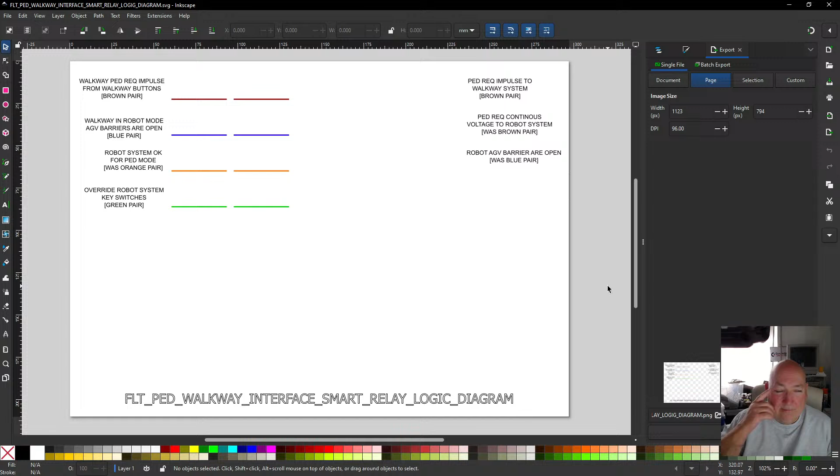It just works off push buttons and contacts, so that's no longer any good. Designed for a pedestrian to press a button and let go, and then the system take over. But in order to work with other systems, other kinds of signals are required. So that's what we're trying to do today.

The easiest way we can do it, so that we can alter quickly or add stuff and remove stuff, is to do it with a smart relay, but a smaller version. So going back to this software here, so let's have a look at it.

So we've got a list of paperwork we've got to adhere to, so we need to get a few things in place, triggers and things. Let me just check we've got audio to do with, we have audio, okay. So various flags and steps and modes and things.

So the walkway, so walkway PED request impulse from the walkway button. So we've got a button on a post, a normally open button going closed when the user presses it. The user can press it, either hold it in, press and let go, and the time for that is random, whatever they want to do.

They can lean on it, start chatting and forget they're holding it, or hit it quickly and let go, or it could even get stuck in. So that signal needs to get converted into something.

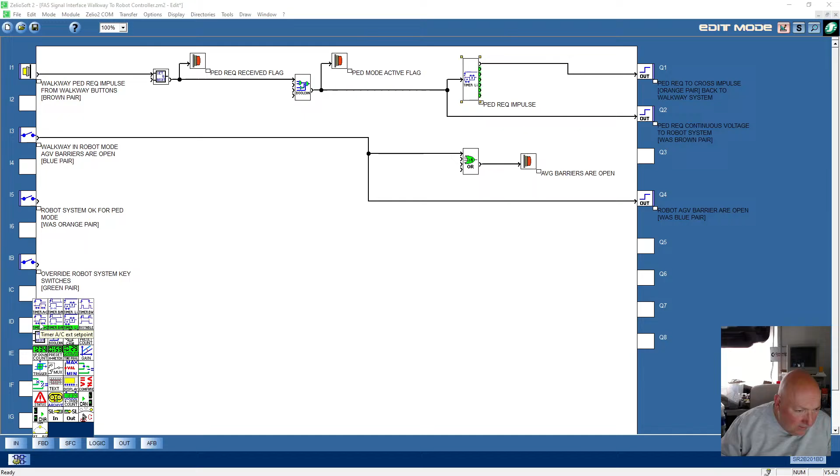Let's have a look at that one. It's a timer, cyclic timer. Probably don't need the cyclic timer, so let's see if we can find the right one. It's not quite the right one, that one. I can't remember which one it is now.

Cyclic timing, pulse on edges now. Can't remember which one it is now. Let's just try that one.

Yeah, this is it. So this will give us a pulse, should do. So as soon as we get this PED mode active flag on, we want a pulse.

So basically you need to come on straight away, and you can come on with a delay. We can give it a couple of delay, so an off delay. So this just needs just a half a second pulse. Tell you what we'll do, we'll give it a whole second.

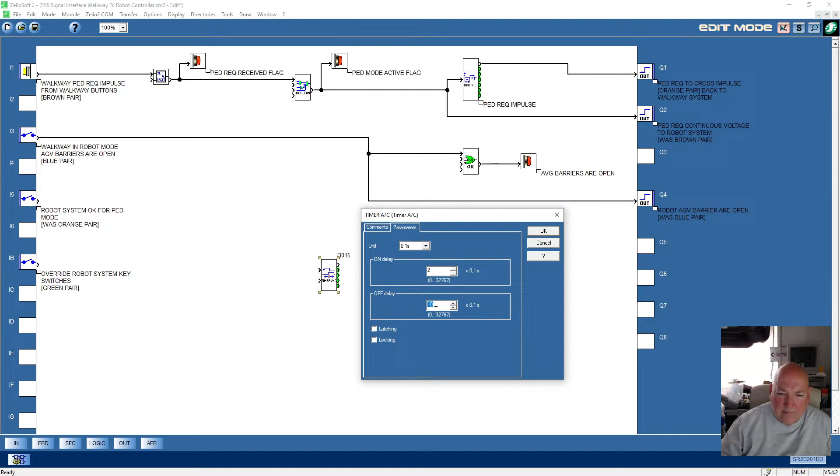10, 1 tenth of a second is a second. So I'll give it that, and we're going to replace that one with this one. Alright, and that's just going to give us our pulse output over there. In fact, if you wanted, you could put another thing on there, but you'll see it lights up anyway.

You're very weak with me. You're very weak. I'm in the West Midlands. I'm not sure whether you've got a directional aerial or not. Right, have you got frequency?

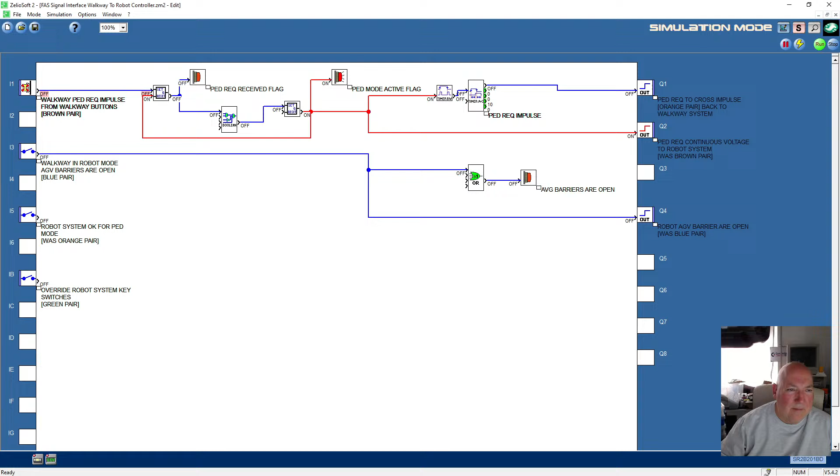The problem is now, because it's continuously holding the reset on, because it's outputting, you're not going to be able to set it again. So any subsequent people it's going to miss. So what we need to do is introduce into there a pulse

like that again. So which one is it? Is that the one? Yeah. So we need to basically put that into there to reset it. And we need to output from here over to there.

So once this gets set, we can just clear it, because we've used the flag up until that. We're remembering it up until that point, and once we've remembered it, and once we've used it by setting this flag, we can clear it. It doesn't need to be remembered unless somebody comes along and presses again.

So this one needs to go when it sees a transition from, only execute when it sees a transition from low to high. From low to high, which is that one. Right, let's see what it does now.

This is where it gets complicated. Right, so give it a pulse. You got your 1 second pulse, and you got your continuous, and you've got your flag was previously set. No, it's still set.

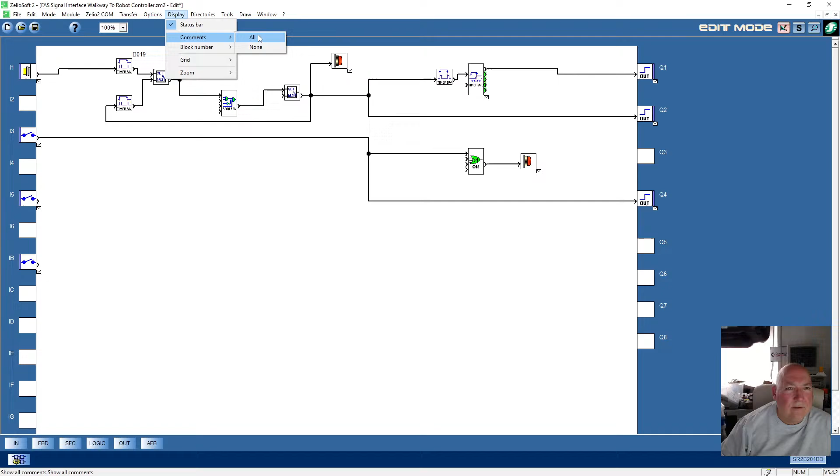So we've got ourselves a little... what's that doing? Display comments all. Right, I've clicked the wrong one there. Right, block numbers none. So we've got a transition from 0 to on, and we get a pulse.

So basically, when I light that up, it'll give me the one pulse. Let's try it. And it'll allow then this reset to take effect, but only if I've let go.

Yeah, it's actually cleared it, look. So let's set it again. But because it has never cleared it, because it needs to reset that, you have knock-on effects. So you've got to wire different inputs and outputs to different parts to reset it.

It's difficult because we might not need all this. Let's just go through it. Right, so we've got an output triggered there, we're set. We can't get a reset because our criteria isn't looking at anything.

Yeah, we have to rethink this slightly. Let's have a rethink about this. So you've got to remember the pulse. So we must remember the pulse. We remembered the pulse.

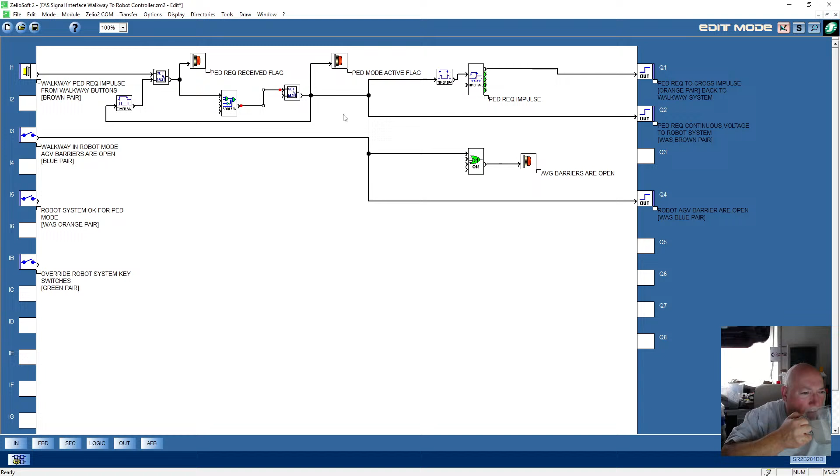Right, so you have to break it down into problems. So why does it take so long? It takes a couple of days to do this. Let's have a think.

So what we're trying to do is, when this gets switched off, it's got to give us a pulse. Now as soon as it gets switched on, it gives us a pulse to clear that out. But we can't clear that out because that happens instantaneously.

So what we've got to do is, as soon as that goes on, it switches, it resets this flag, because then this mode has taken over the previous flag. That's the request. So take your request, it remembers it till the system's ready and the criteria is satisfied, then it'll set the flag.

Once that's set, this can be reset, but it can't hold the reset onto it because it's got to remember another time. So that's why we did that bit, so we got it to reset it, but the second time it gets reset...

Let's just go through it one last time. I have to keep simulating it. Right, so we go like that. So we've got our permanent signal coming out. The flag is not reset.

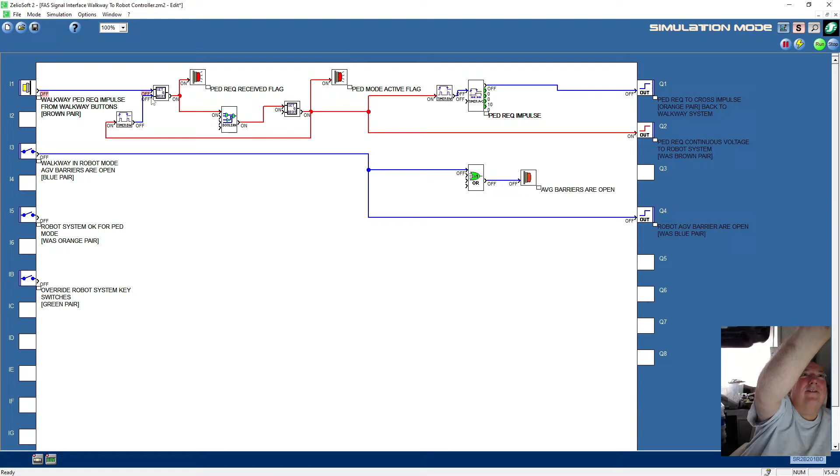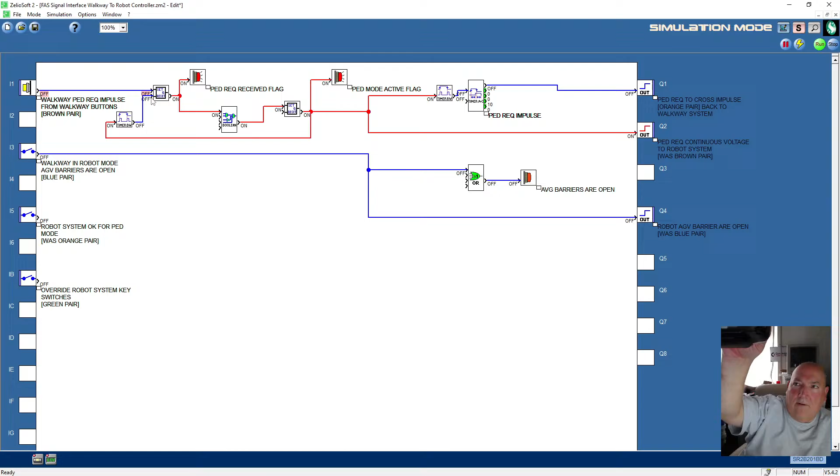Right, just sort of playing around. So we get our pulse coming out of here. I didn't do any more with that. Saying I've now got it in front of me. I thought I got two things. So it pulses this out, and it's still set because so.

Now we put, hang on, redo. So we want to, let's put that back again, temporary.

I was picking up both of them. Right, let's try it again and see where we got so far. It's been a while since I did a major bit of programming.

So it's cleared it. Now it's taken its set, so it can't clear another one. As soon as I do that, it's going to remember it. But that's okay because it's remembering another press, but we're already in pedestrian mode, so the pedestrian would have gone through. If we're in the mode, there's no reason to remember another one. It's only if we're in the opposite mode, if we're not in ped mode. So really, in that case, it could just go straight to it then and reset it.

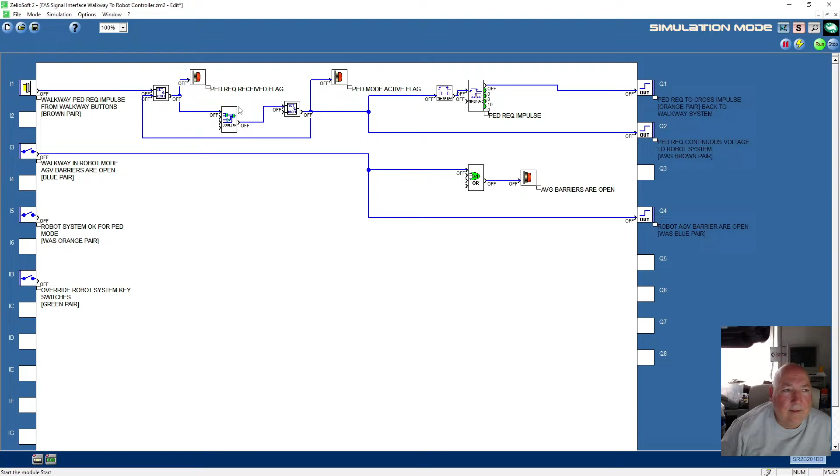Right, simulation, run it. So we give it a pulse. We've got our set and we've got our permanent reset. This is ped mode, so it doesn't really matter what we do here. It's reset the flag, it can't take any more. There's no point in taking any more because you'd only have to reset it anyway. We're in this mode. Until that mode is clear, it won't allow you to give it another request. That's fine.

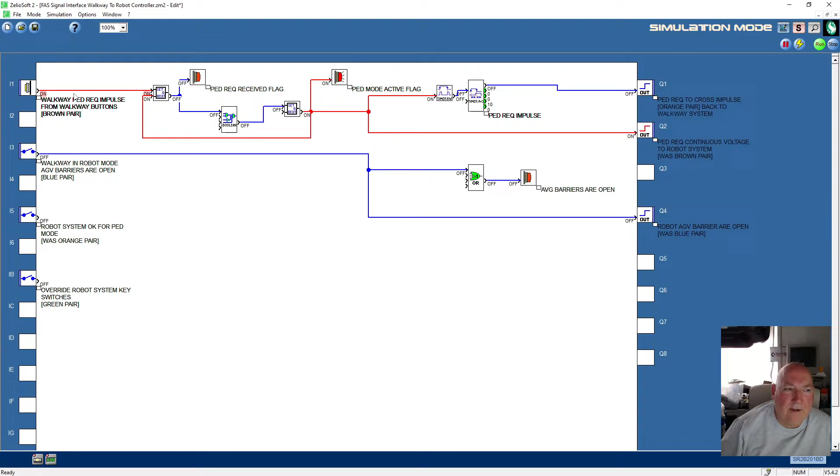We've gone from ped request flag to, well, if we stop it and run it, we're clear. We give it a pulse, it triggers it based on criteria. You get your pulse going out to the actual walkway system, which tells it to, but only based on this criteria. Yeah, that's okay.

That's okay. I didn't correlate that once this is set, we don't need to worry about more inputs. We only need to remember that when we're in a different mode. And if we're in a different mode, there won't be a reset on here, and it'll allow it to remember it. So that's fine, that's Zelio, pure Zelio logic. So it's okay, right, so far so good.

So that's part of the system. Now the criteria, we haven't hooked up with all the rest yet. At some point, the other part of the criteria will reset this system, turn it off. Right, so far so good. This is okay as it is.

So that can be moved over a bit now, and we can bring this up together. Let's free up some space. Yeah, keep it nice and neat, free up a bit of space, that's fine. So our mode flag can come over a bit, keep it in the middle. We'll keep all the mode flags in the middle, keep them in the middle.

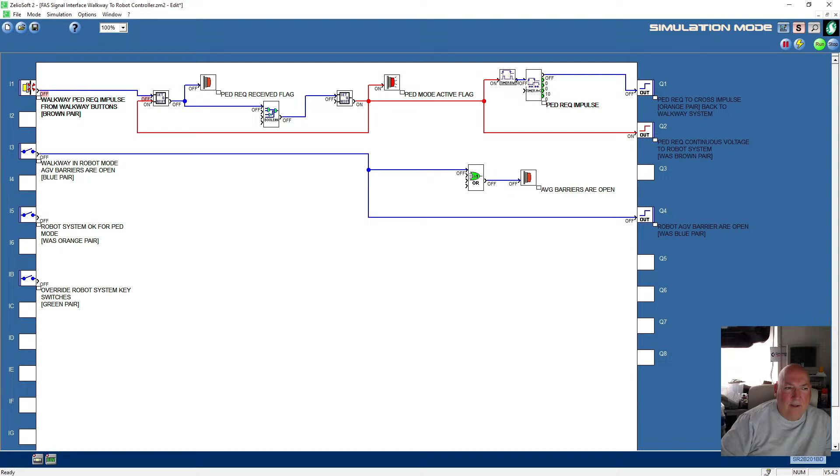That's a permanent pulse, so we've got our PED mode active flag. We've had our pulse, we've had our continuous signal, and we've got a continuous reset on, which resets our flag, and we've got a permanent pulse which is getting ignored. Doesn't matter because we're in this mode. If we were to come out of this mode by resetting it, I don't know if I can reset it. No, I haven't got anything on it, so it won't let me reset it.

Right, so that all seems to be okay. So what we've got to do now is save it. So far so good.

Right, so we need another mode now. So we've got different modes. PED mode, flag is active. I put flag on it, but it's just making me read the flag bit. Tell you what, let's get rid of the flag, it's confusing me. Everyone knows it's a flag, if it's lit up, it's a flag.

PED request received, flag, that can stay. PED mode active, that's fine. Okay, AVG barriers are open, that's just that one there. So that could be some kind of output, that's just an output there, that's fine. AVG barriers are open, that comes out, tells the rest of the system.

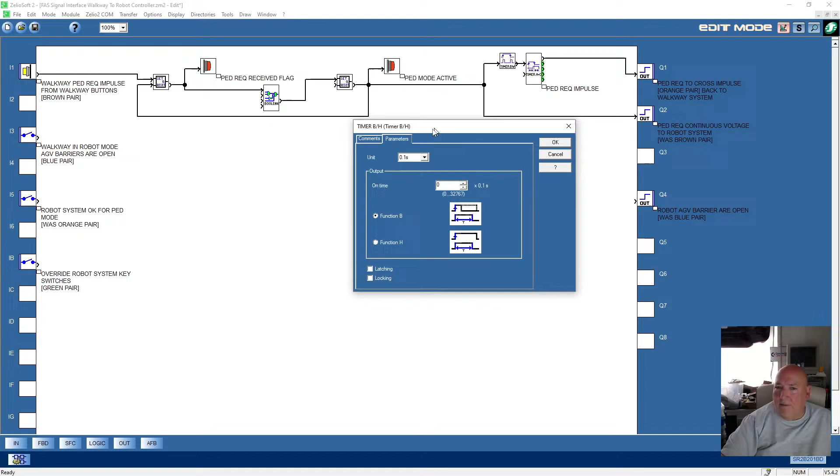So does it need to be a delay on timer? Probably. I can't remember which one it is now. What we got here? Function a on time. No, is it delay on? Yeah, it's a delay on, isn't it?

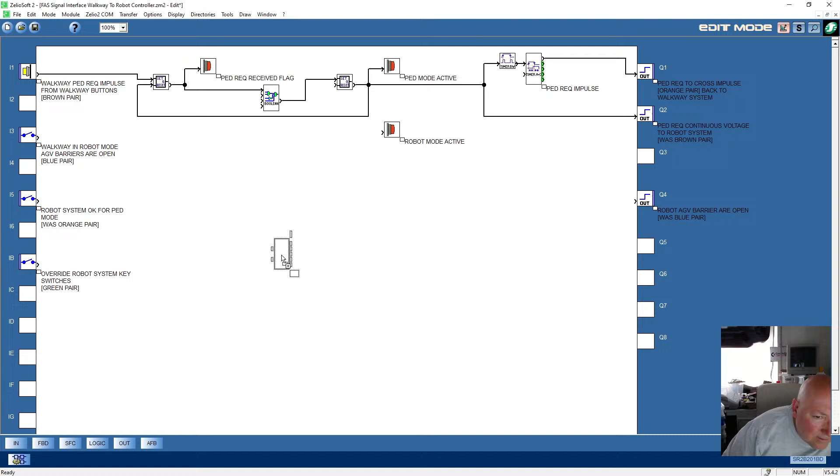Needs to be continuous. That's not the right one. Let's find another one. Function B. No, that's not it. It's not labelled up very good, these. I don't think they're labelled up good. Cyclic timer. A/C timer. Let's try that one. Not sure now, I can't remember which one it is. Here it is. So it's just a normal timer, right?

So what we'll do is we're going to get a continuous signal off the system, so we come down here into this timer. It's not a boolean, so it's a timer. We'll alter that in a minute.

So then your timer gives you a little bit of delay. So what? Also we need an output over to there, I believe it was. Let's nudge that down a little bit. That's better. Right, and that.

So we need to set some timers, so it's an on delay. We need an on delay, but we want to, as soon as we get that signal, we want to reset this latch. So momentarily it won't be in PED mode, or it won't be in robot mode. Just momentarily. So on delay, off delay. So it's not an off delay. We might need an off delay, but we'll just do half a second.

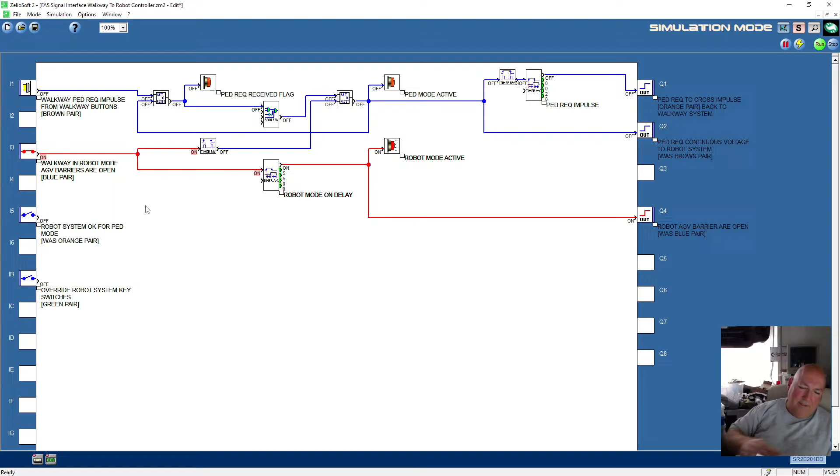There's one more on here. Right, there's one more which was supposed to be, I think it was the PED barriers. We'll have to have a look at that. Need to know when the PED barriers were definitely open. Or did we? Robot system okay for PED mode.

So that would feed back into there. Override robot system. I'm sure one of these was to tell us that the... oh no, that goes into the other... that's the walkway system, so that's fine.

I'm going to have a drink of this.

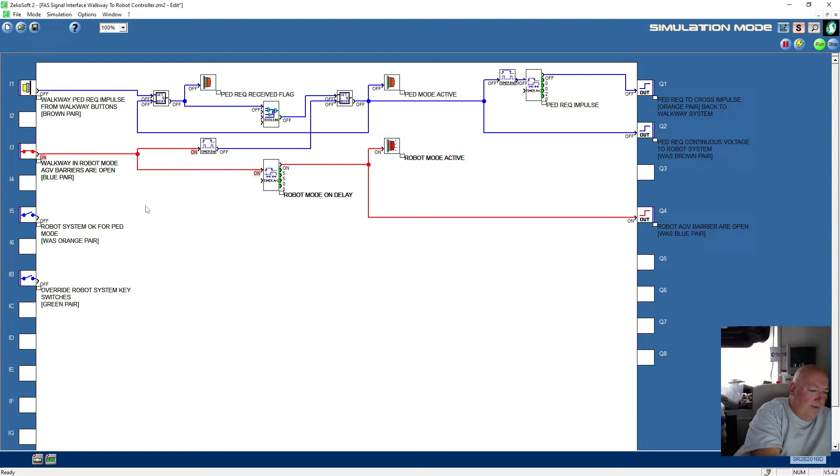Right, so we're in robot mode, active. Somebody comes along, presses a button, that outputs the system takes over. As soon as it starts to raise, it comes out of that mode.

Your PED mode is active. As soon as it's completed its cycle, your walkway returns again. It cancels that one out, and it's counting up, and that's obviously exaggerated. That's actually confusing now. Let's change that back again. That's because I've extended it, it's just confusing.

Let's go back to, right, so we've got an on delay.

Yeah, just half a second off. Let's say a second, one second on delay. Right, and the rest is fine as it is, isn't it? Yeah.

So that's the normal state. As soon as you power it up, that would only give you that signal if the system was in robot mode, which is fine. So it passes the signal on, tells it's in robot mode. You give it a trigger.

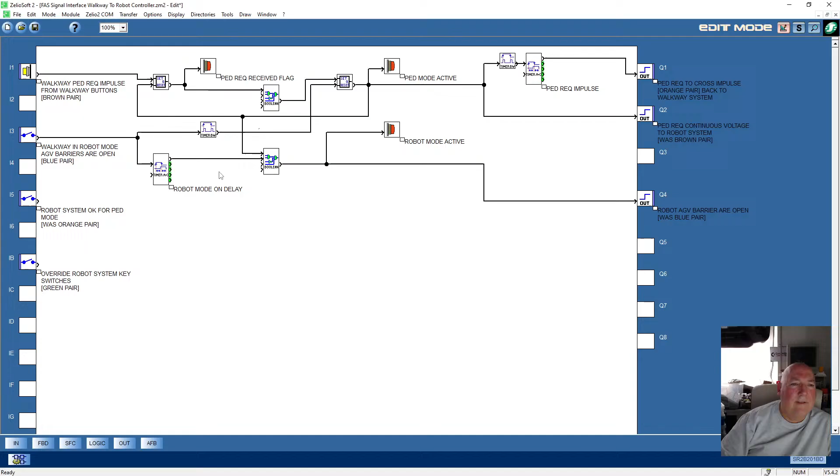Okay, I'm going to change the boolean to off and on. And that can either go from there to there or to there like that. It doesn't matter, probably looks better like that. This could probably drop down as well. We'll leave it where it is though. Save it.

Start it off again, so we run it from there. We've got on delay, we're in robot active mode. We set the flag to request to cross. It's pulsed the system, it's immediately dropped out here because the system will be opening. We're in PED mode is active. When it's finished, the system will return back, and the only way you've got to know about it is when this comes back on again. Immediately cancels out the PED mode.

Yeah, through that way, we're in this robot mode again, so we give it another request. Immediately cancels this out, transitions straight to PED mode active. Now let's have a think about it. So we're going straight from robot mode is not active straight into PED mode active.

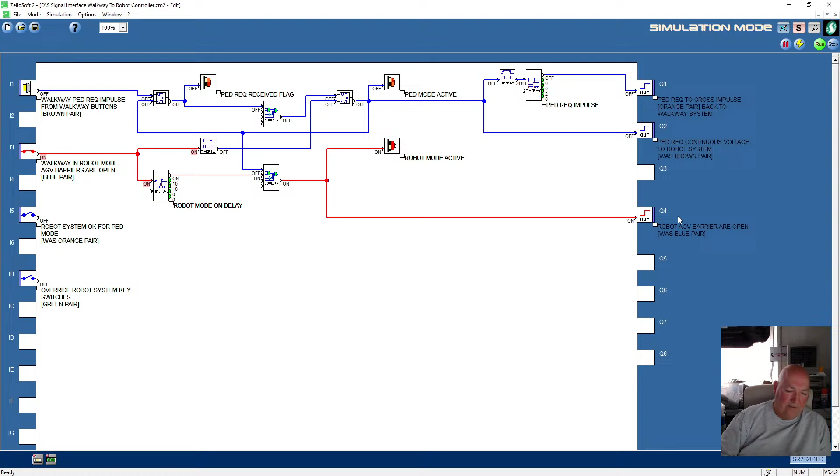Don't know, let's try and read it again. Our signal back - oh, that's their signal back from the robot IO controller, to confirm with the barrier system it is okay for the pedestrian barrier to open and robot barriers to close. Okay, so we need to be reading the open signal on the orange pair - robot system okay for ped mode.

So our signal back to confirm with the barrier system is okay for the pedestrian barriers to open and the robot barriers to close. Right, so that's a signal we need to integrate into the Boolean, which will then go to this Boolean.

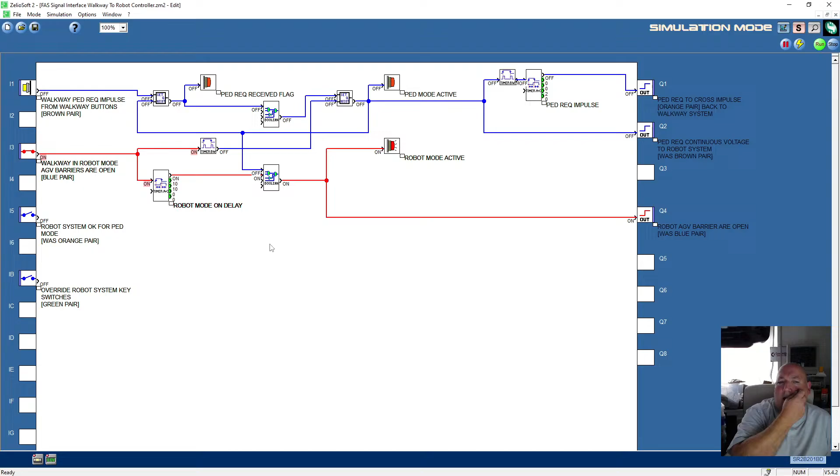If it's outputting, if there's a signal coming into it like that, it means it needs to allow the pass-through of... right, yeah, so we need to pass through this signal.

The flag needs to be set. We need to go to there, and it also needs to go to this one. So we need to introduce that into it. So we're gonna have to go one up to there.

Don't know if we need a delay on it at the minute, or we won't put a delay on it, or just come into there. Right, well basically we're going to say

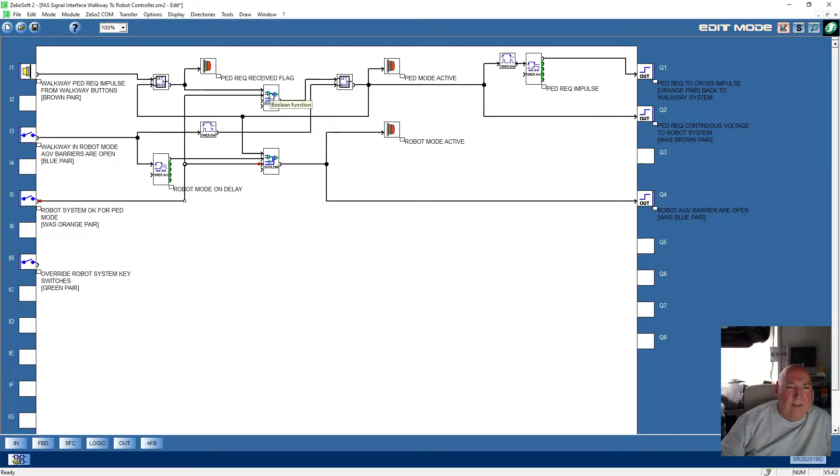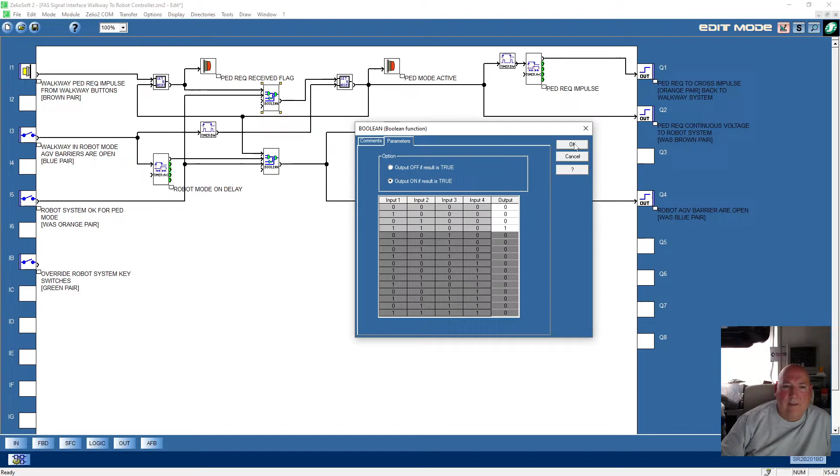when this is high, that is high, it'll pass a signal through. So now we need to alter this, instead of one being on, they need to both be on. Which is okay to go into PED mode, right, okay. And this one needs to be altered.

So that'll be high. So we need to be watching for that. If that's high, it's gonna stop this. So it can't output that if this is high. Which, because the controller's telling us it's okay for PED mode, so it can't be okay for robot mode. If it's okay for PED mode, we need to introduce a 1 into that.

So we've got off, on, and we need to be an off. Yeah, because if it's on, you can't have it. So that is on, off, off. That's right. On, off. Must be off. Yeah, so that is good.

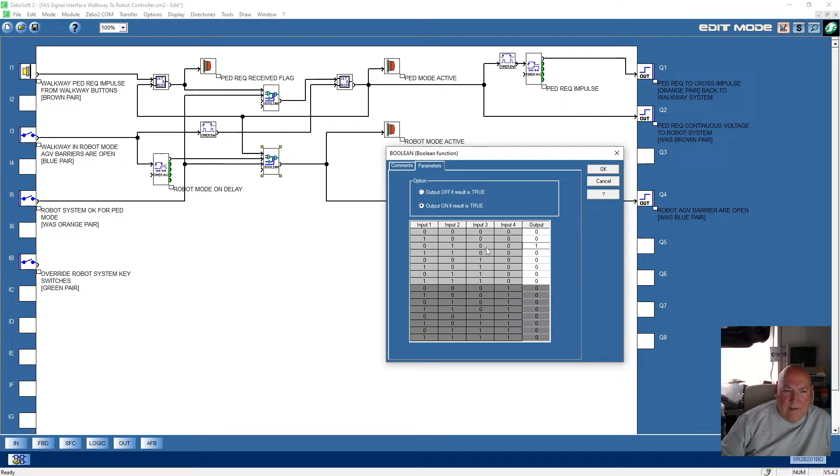That's okay. Save it. Let's try it again. So we're going to go like this. We're going to start it. It's counting down. It's gone into there because the robot system is off.

So it's allowing this. So we've got an off, on, off, which allows the output to the robot mode active. So that goes straight through to that.

So we'll go through the motions, we give it a pulse. Now the pulse has come through, the flag is set because the robot system has not given us the go ahead with a high signal.

That's as far as it's gone. We can give it multiple presses, doesn't matter. People are pressing buttons like mad trying to get through the walkway. The robot system says no, not ready for pedestrian mode. We're still in active mode, that's fine.

So we're waiting for this signal now off the robot system. So the walkway is in robot mode and the barriers are open still, yeah. That's fine, everything looks good.

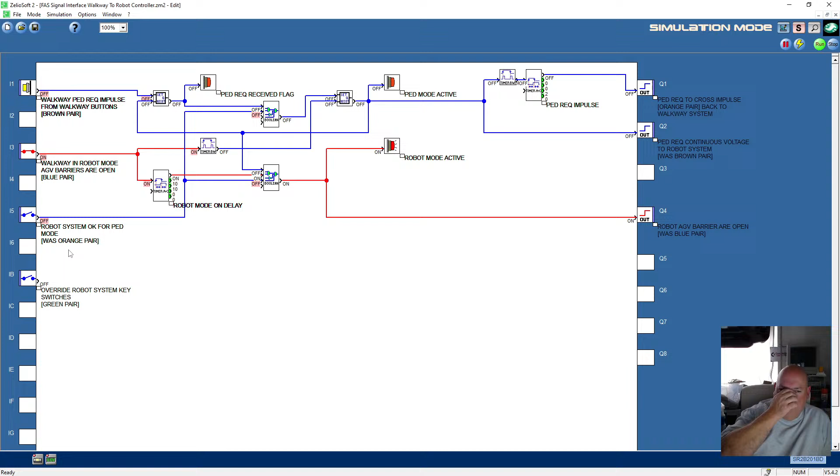So now it won't - it's ready now to take a signal. Robot system OK for PED mode - that's something I don't have control of, it comes from the robot I/O system, whenever it decides it wants to let us through. So if I constantly do anything here, it's just going to get so far through the system, it's not going to let it come out and change the mode.

And it's waiting on this here to be told it's okay. Now we go OK, it immediately transitions over. I'm not sure I like it going straight from this to that one, I need a bit of control over it. So let's go through the system again.

Right, so that's the default mode, it can't be in. So that can be in that mode, and this can be while it's off. What does it mean? So 5 volts - change a constant signal will be used to identify the state of the barrier. When AGV barrier is open, the state will be 0 volt. When pedestrian barrier is open, it changes to 5 volt.

Right, so that's not - so when the pedestrian barrier is open, it's saying, right, hang on. It's nightmare stuff, this is nothing compared to the last program. Yeah, I don't know how I did it, the last program, it's crazy. Can I load it up again? Let's load another instance - what will happen if you don't load two of them?

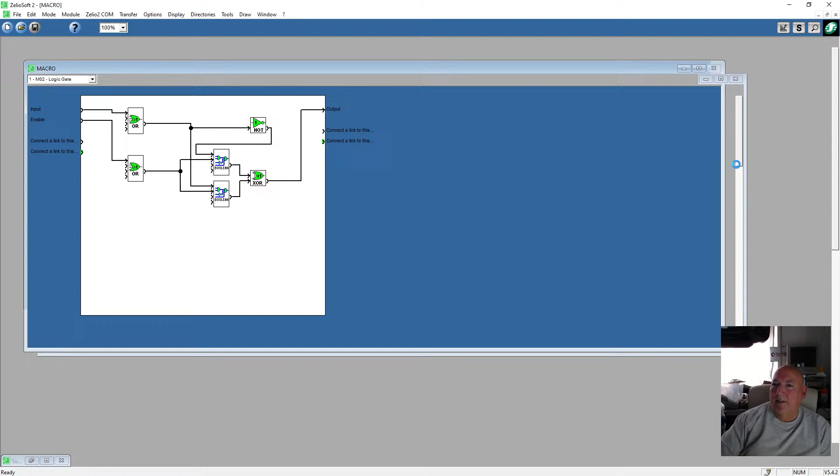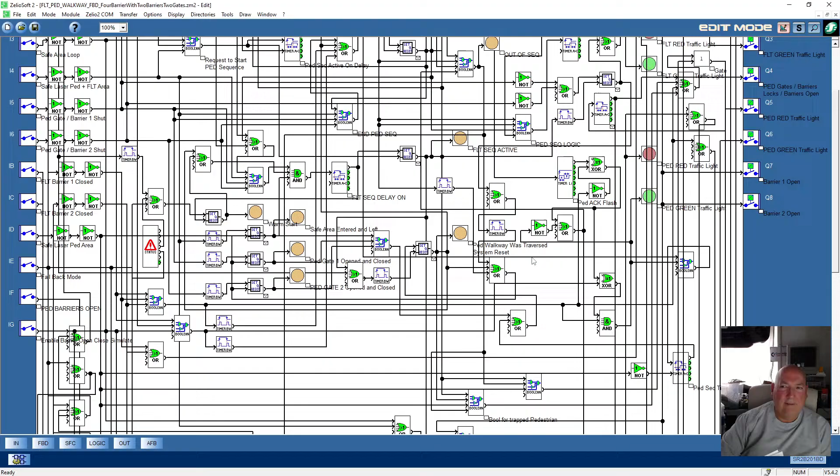Right, so this is the one, this is the walkway system. Look at that lot. It's funny, this is just this bit. It's crazy, yeah, not good. If you ever want to do this job, don't do it. Do something else, don't do this kind of work.

And the funny thing is, I could write this in C++ with functions and loads of criteria, and do it very quickly and efficiently. Unfortunately, I can't program the Schneider Smart Relay with C++. Well, I could actually, because it uses the same - it uses the ATmega. It's not a 2560, it's the half the size one, same thing but half the memory, half the capability. So basically you could wipe its firmware clear, the Schneider firmware, get rid of it, put an Arduino core on it, or whatever core you want, and program it in C++.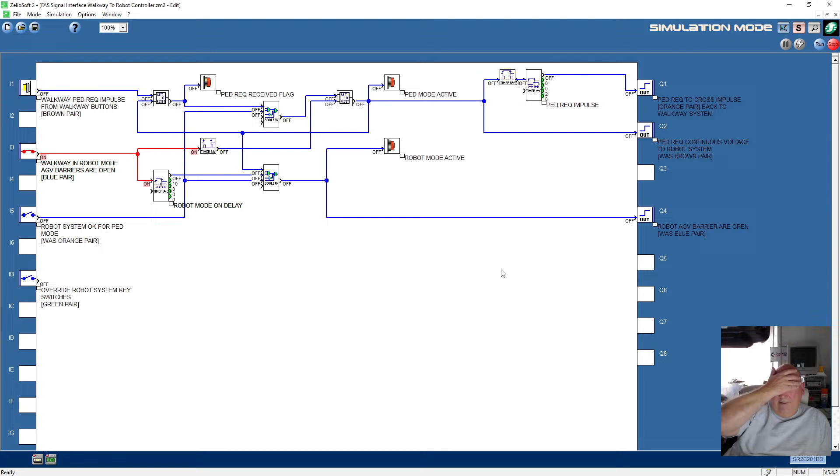I'll keep threatening to make my own PLC, based on - there'll probably be an ESP32. Could be an AVR if you want to stay with AVR, not AVR, but I'd probably put a 2560 in it and just run Arduino core, because all this could be done in functions anyway.

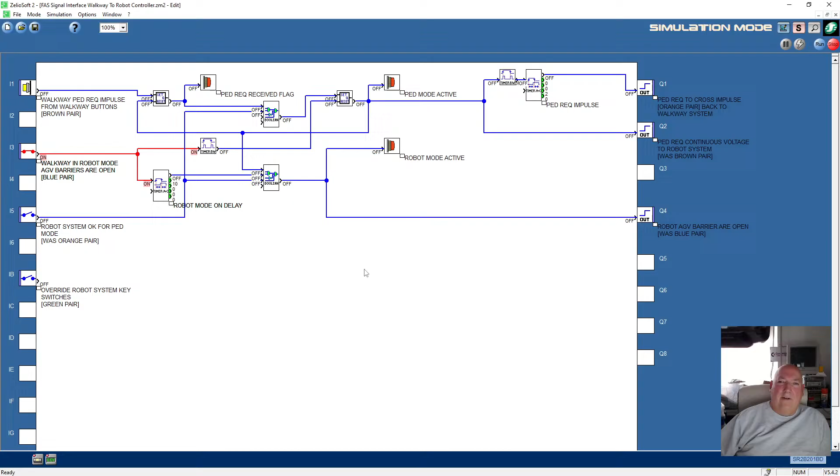This is what people, they buy this relay, it's certified to a certain degree, and they push the blame onto someone else. They say, well, I bought the thing and programmed it just like you said you could do, so if it doesn't work, I don't know why they're selling it. That's what they could say. You put your Arduino controller on it you've made yourself, and everyone starts pointing the finger at that straight away. They say, oh, it's because you made it. No, it's not, it's because of some other reason. But anyway, you've got to go with this idea, it's not good, but what can you do? Anyway.

Right, so we're getting there, sort of. It's an evil thing, I wouldn't recommend it. It's too many nested levels of thinking required. Or am I just getting old? Maybe just getting old. What's going on here? Nothing.

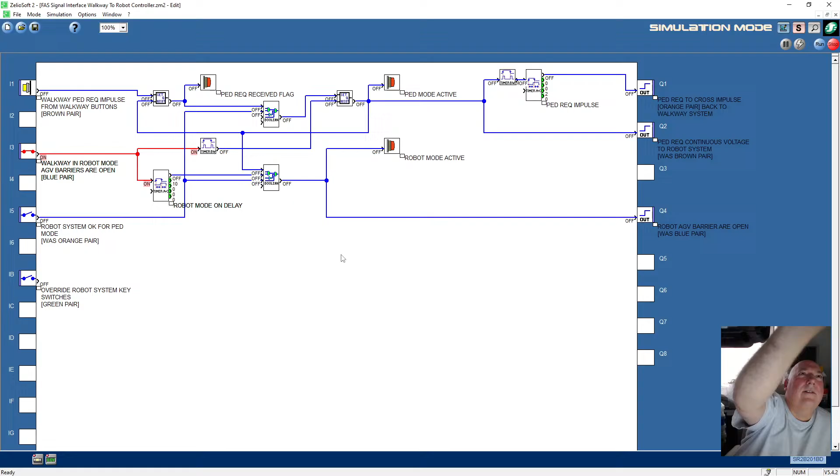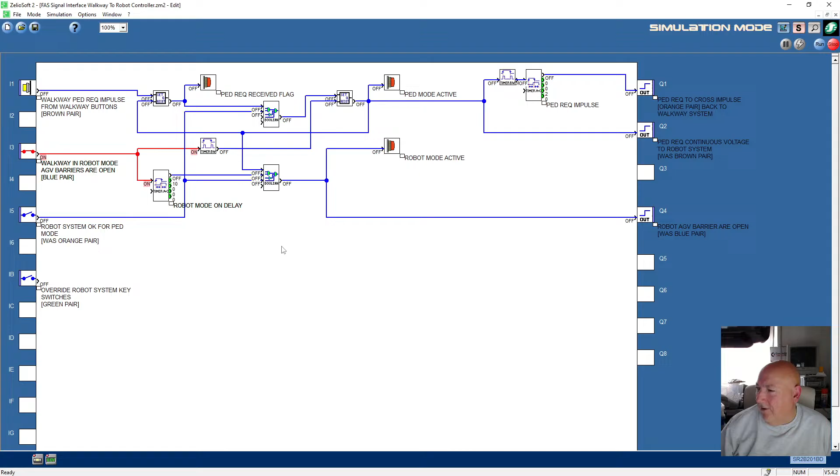Let's have a look, so time we got - oh god, it's 4:15, 4 already, shit. Right, good news is I've only got another 45 minutes of misery on this. It's evil, I wouldn't wish it on anyone, but you have to be in the right frame. Imagine trying to do this in a busy office space, you've got no chance.

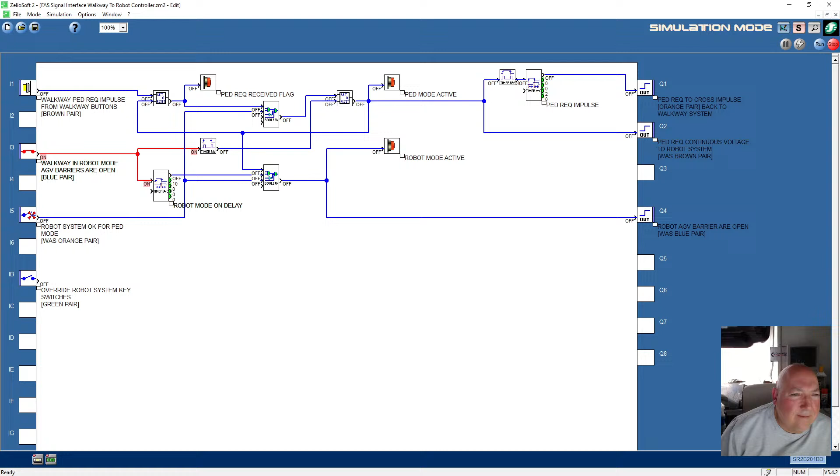Anyway, let's carry on. So, yeah, I want to introduce a delay. When it transitions, we don't want to come straight out of this into this. Now we've got a delay going one way, and we want a delay going the other way. And the flag will be set, and then once the flag is set and the boolean is active, we want a delay here to set it. We want to probably disengage that from there, put another, copy that, we'll have that somewhere. Now we've got to have it over here somewhere, so we need to keep these lined up. I'll probably move that over a bit.

That's a broad French accent you got there, mate. Very broad.

Right, I'm just gonna make us some space. Very important to make some space. If you don't have space, you can't do it.

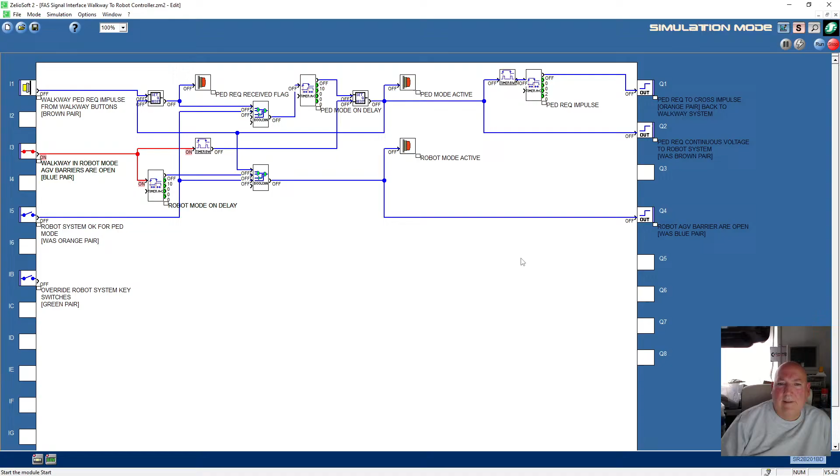Right, default setting and run. So we've had a delay before we get into robot mode. Somebody comes along as a request. So they've requested it, it's come through to the flag, it's not got past the boolean. We're waiting on this to become active.

Okay, so it's waiting on that, it can't send through, so robot system is okay, the robot IO is telling us okay. And why would it tell us okay? Let's have a look. So we're in robot mode, is active. Right, so we haven't actually given it, oh no, we haven't given it a signal yet.

Right, so we've got a little bit of a problem here. So that PED request voltage, right, so that's directly controlled from when it's released the signal, and the robot system is okay for PED mode. So that would suggest to me that the request, the continuous signal, needs to go through to the I/O controller, which you can never do. It's waiting on this, it's waiting on that.

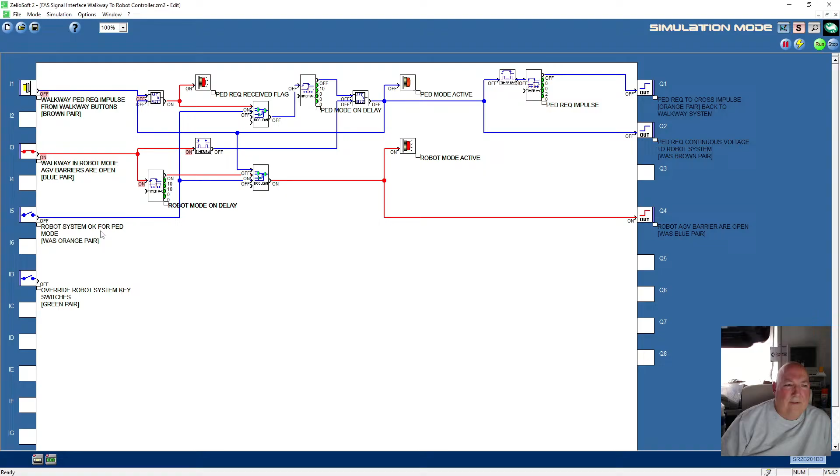Robot system, hang on, let's just read the paperwork again. Right, so was the orange pair, signal back to confirm whether it's okay for the pedestrian barriers to open and the robot barriers to close. A 5 to 12 volt constant signal until pedestrian barriers have closed and the AGV barriers opened again.

Right, so it shows a constant signal. So that signal there needs to be a constant one, and it's not. So it would be, wouldn't it? It would be like that, because it's the opposite of that. So that one is outputting.

Hang on, let's have a look at the blue one. This is why I'm putting it through a relay, to be able to swap the signals. You do it for me anyway. Right, blue voltage signal to show physical state of barrier. When the AGV barrier is open, the state will be 0 volt.

So yeah, so it's 0 volt when it's energized, and then the orange pair, pedestrian barrier closed. Pedestrian barriers to open, it is for the pedestrian barrier to open and the robot barriers to close. 5 to 12 volt constant signal until pedestrian barriers have closed and AGV barriers have opened again.

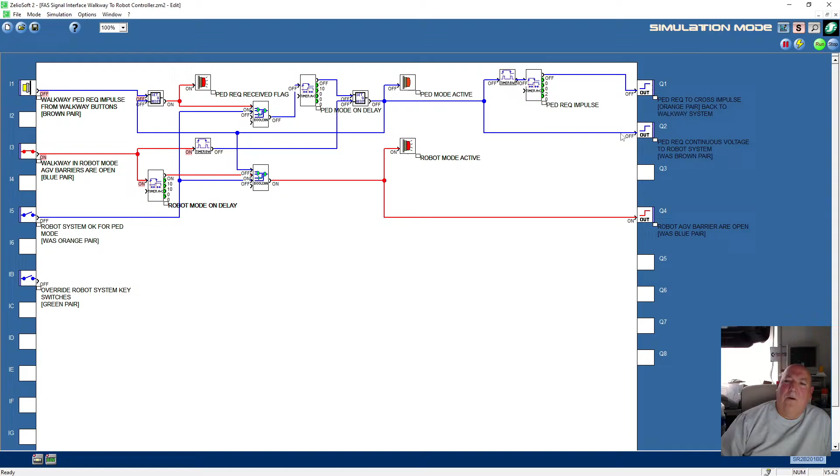So that's what's confused is the signal, because the signal is converted on a relay after, unless, yeah, because we're doing it that way, because we don't want it to be in a non-operating state and giving the signals out. It needs to be in run mode, not stop mode. So we will have to wire through to the relay. So that is the right condition.

Now it's outputting a continuous voltage to the robot system. PED request. It's not really a PED request anymore, is it? Although it could be. Let's have a look.

So the brown pair - hang on, voltage constant signal sent until pedestrian has crossed. This is where it gets confusing. Too many coloured wires, too many wires doing similar things. Not a good idea ever. But anyway, it's what we've got. We've got to go with what they give us.

Brown voltage, constant signal sent until pedestrian is crossed. A constant signal. The RCS is checked and tells the robot to move. Confused. There's another official sheet - that's my handwriting.

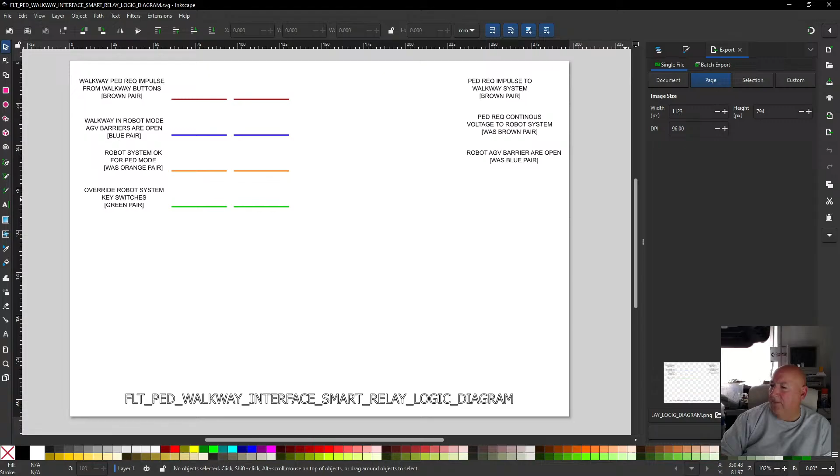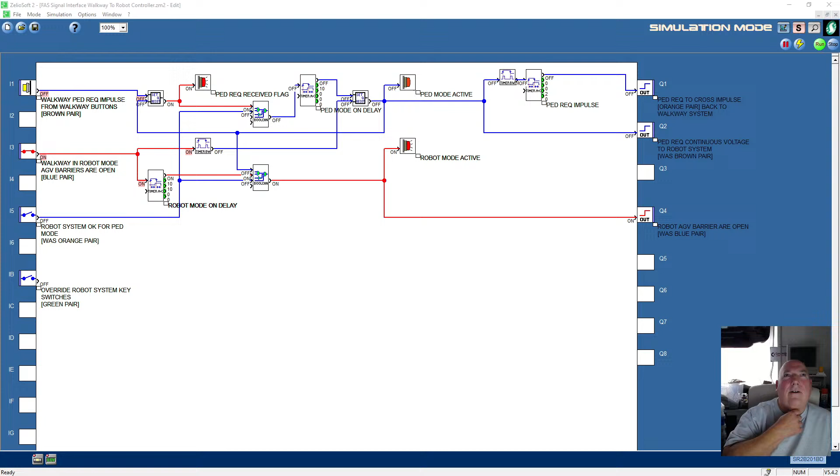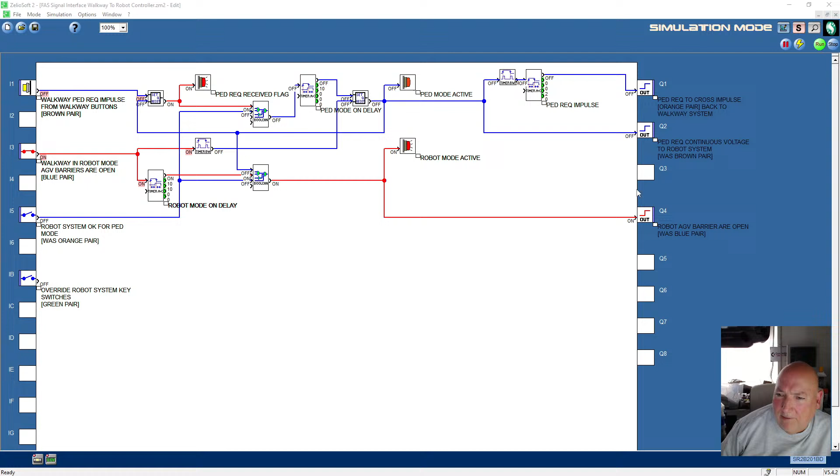Anyway - right, yeah, so what's getting confusing is the signals. We're relying on the output of the relay swapping, which is not a good idea. I need to see it on the screen. I can't really add the relay and signaling in here.

So how can I do it? When it says I need a 5 volt signal or 12 volt, I need to be high on this end. Really? Yeah, we'll do it that way. But then if I do that, let's have a look.

Brown pair, typically 0 volts. When the button is pressed, it sends - when what button is pressed? So that, yeah, the...

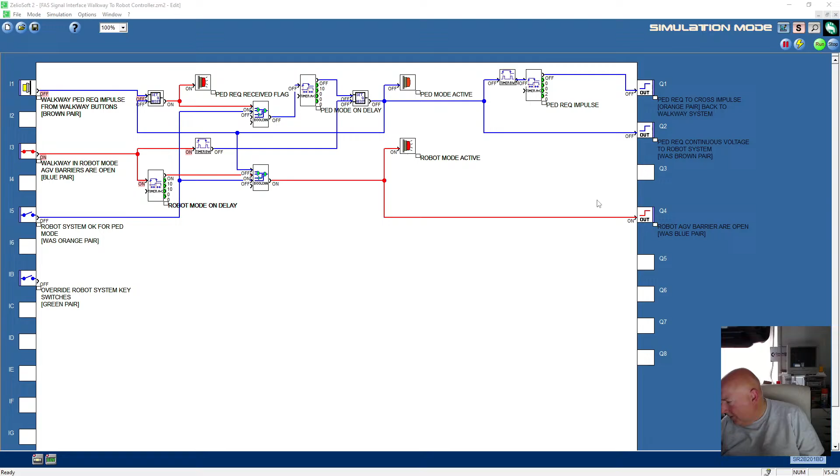Right, so I started doing something on the 24th of the 9th. That's when I had a look at this previously. It's now the 15th, so it's 2 or 3 weeks later. Right.

So, walkway signal inputs. I want pedestrian request to cross from push buttons. That's blue pair, I2, blue pair walking. Walkway is in robot mode. That's a nightmare, isn't it? Q1, none of this makes any sense at all. There's 4 sheets that don't make no sense, not to me anyway.

Right, scenario 1. Q7 AGV robot FLT mode. Walkway system is powered up. Both pedestrian barriers are closed. Both Q7 AGV robot barriers are open. The safety zone between the barriers are clear of obstacles. This is scenario 1. Oh, that's just how the walkway system works, isn't it?

Oh, just mentioned the pairs though. Barriers are open, the safety zone between the barriers are clear of obstacles, the pedestrian traffic lights are red. The walkway system is awaiting a push button request to cross from a pedestrian. The brown pair is low, the blue pair is low, the orange pair is low. This makes more sense to me now because I wrote this.

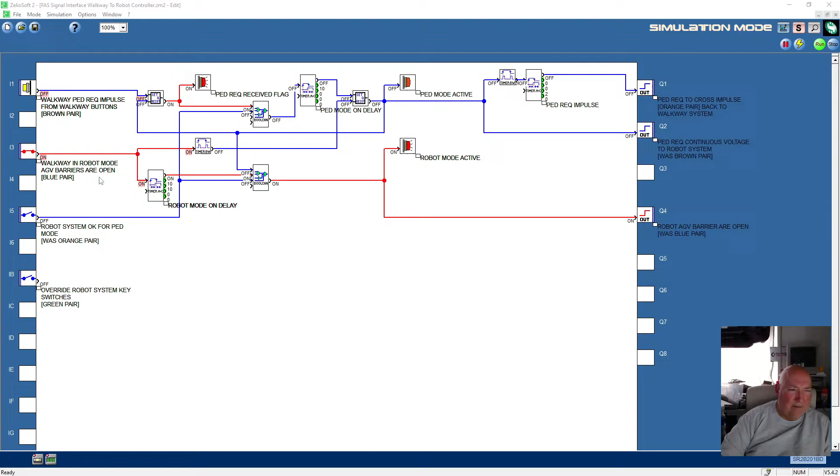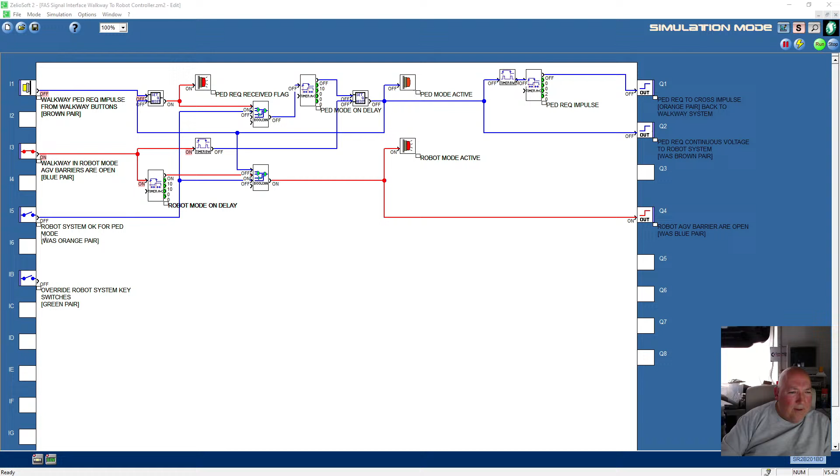Walkway in robot mode, AGV barriers are open. Right, so pedestrians are red. The walkway system is waiting a push button request to cross from a pedestrian. The brown pair is low, and the blue pair is low on the inputs. Well, my blue pair is high. And it's saying robot mode is active, that's why. This is scenario 1, so it'd have to be off. Right, okay.

It's clear for this Q7. Oh, orange pair low, that's an output. So your orange pair are there. Orange pair are low, is the output. Well, they're both low anyway. There's only one orange pair. It says it's clear for the Q7 AGV robot FLT to pass freely.

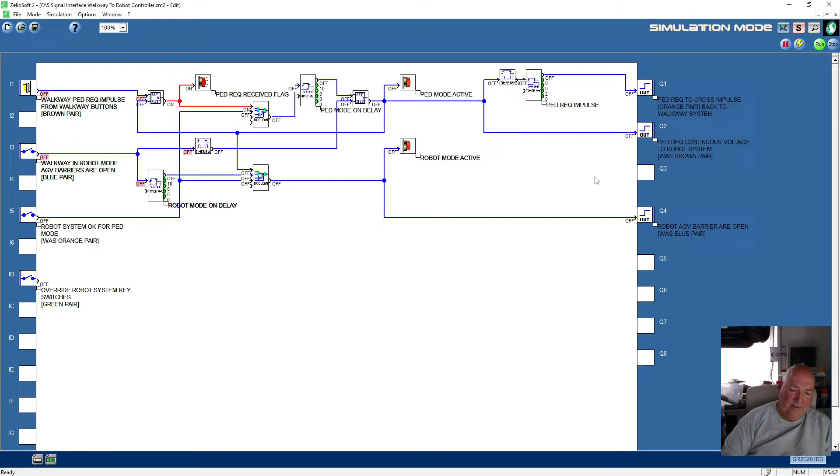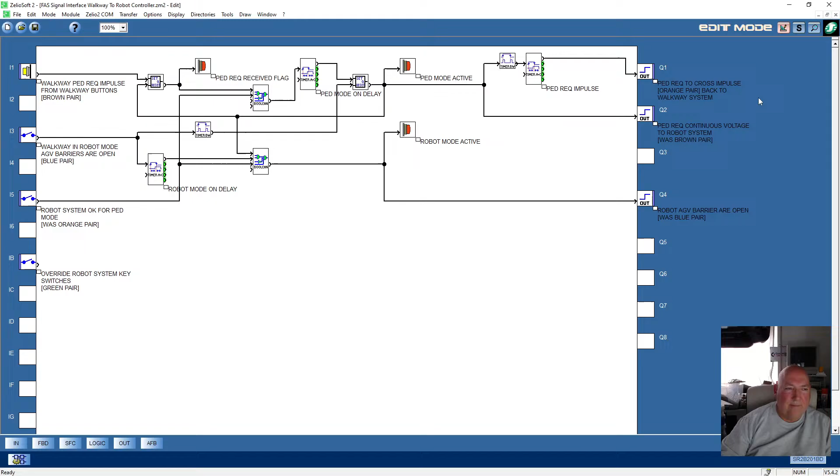So the orange pair output, I need to put input output on. Let's just change this a minute. So we've got this one here. Don't know if it'll let me put more text in.

So that'll be the brown pair, that's an input. Right, input, they are inputs, so we know it's an input really. This is... that's also an input. Input. Robot system OK for PED mode. Right, so that's an input. Well, they're all going to be inputs, but it's an output from the robot system, but it's an input. It's crazy.

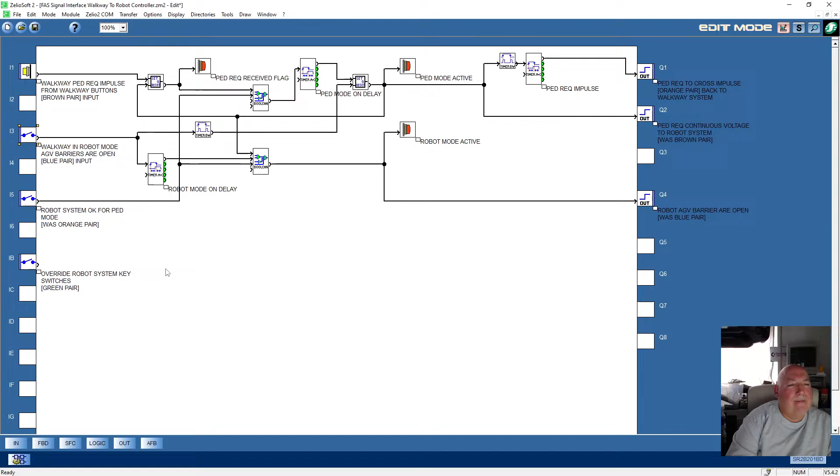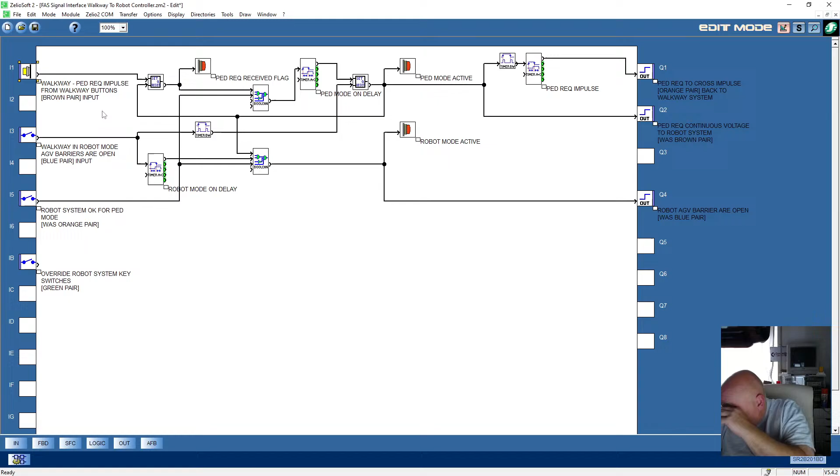Right, okay, let's try again. So if we put walkway hyphen... so you can't format stuff, from the walkway buttons, yeah. Yeah, it's not helping, is it, doing that way? We've got to keep it free of ambiguity.

So, walkway PED request impulse from walkway button. So right, so this is a PED request impulse from the walkway buttons. Okay. PED request impulse from walkway buttons. It's an input, it's a brown pair from the PED request. So I don't know.

The more I add to it, the more complicated it gets, and more difficult to understand. PED request impulse from walkway buttons. Right. Status, so that's a request. Walkway in robot mode, right, so this one is a status. So it's a status. So it'll output when it's in robot mode.

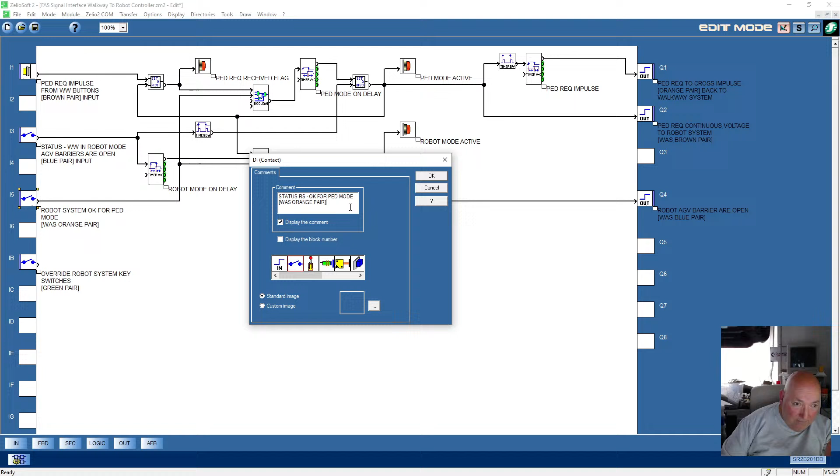The only reason we mentioned it was the orange pair is because that's what was referenced in the documentation. So status from the RS, robot system.

So it is a status, and it's a, hang on, so it's a robot system status. So it's a robot system status. So it's OK for PED mode. And it's an input. Well, we know it's an input because it's in the input.

Right, let's go through this. So this is the walkway status. In robot mode, AGV barriers are open. In robot mode, right, that can stay like that.

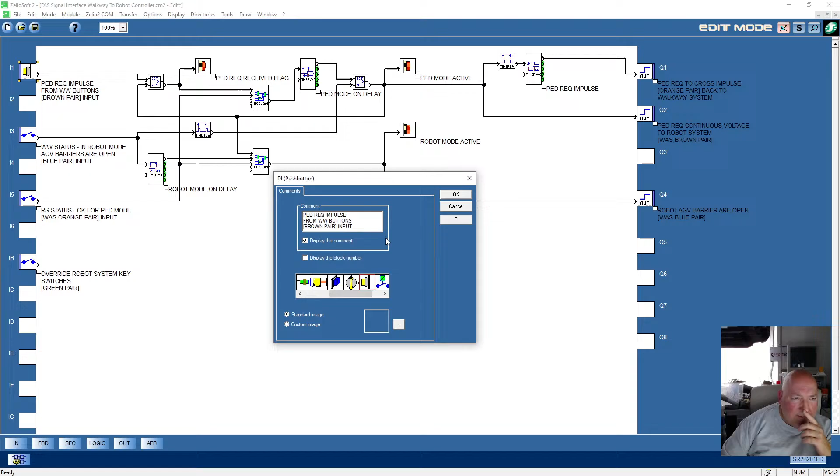Right, this one next. And this is, it's not a status, it's an input. So it's a walkway, not status, it's an input. PED request impulse from the buttons.

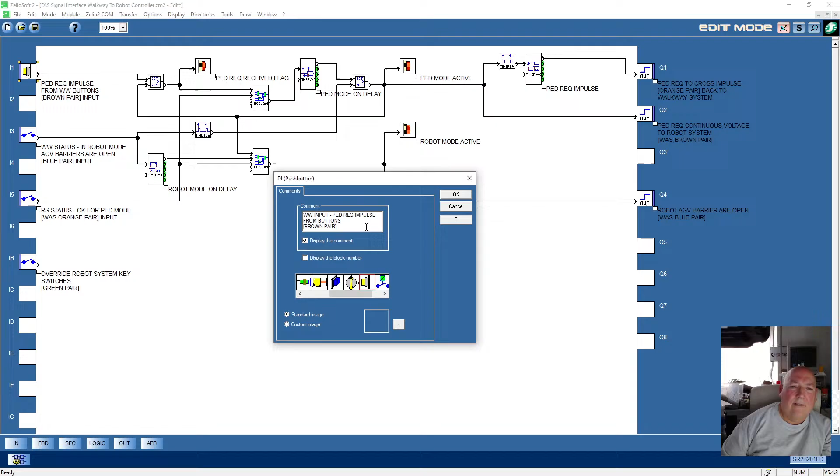So we don't need that. Walkway input, walkway status, they're all inputs. Status as an output, I don't know. It's all crazy to me, mate. Right, in robot mode, PED request impulse from buttons, walkway status, it's in robot mode, open.

Walkway input button. Right, let's change that, try to make logical sense. Walkway button. Walkway buttons. PED request impulse.

Brown pair. Walkway buttons, PED request impulse. Walkway buttons, PED request, and it's an impulse. Okay, maybe I'll change that again. It's a PED request and it's a type of impulse. Impulse, right, okay.

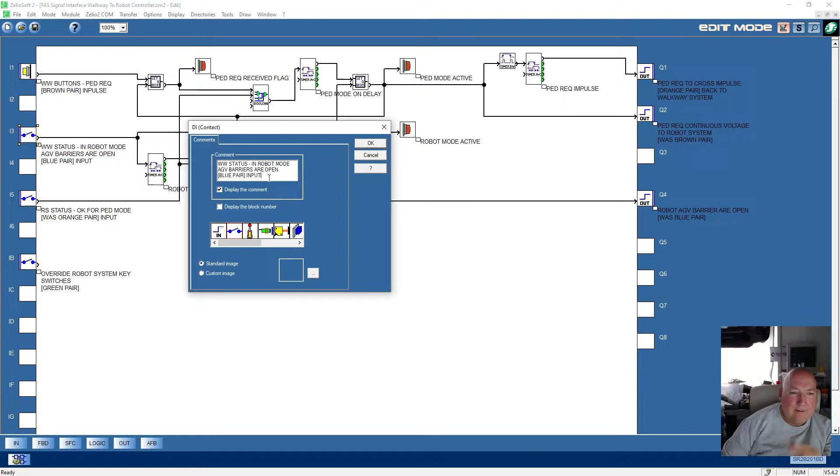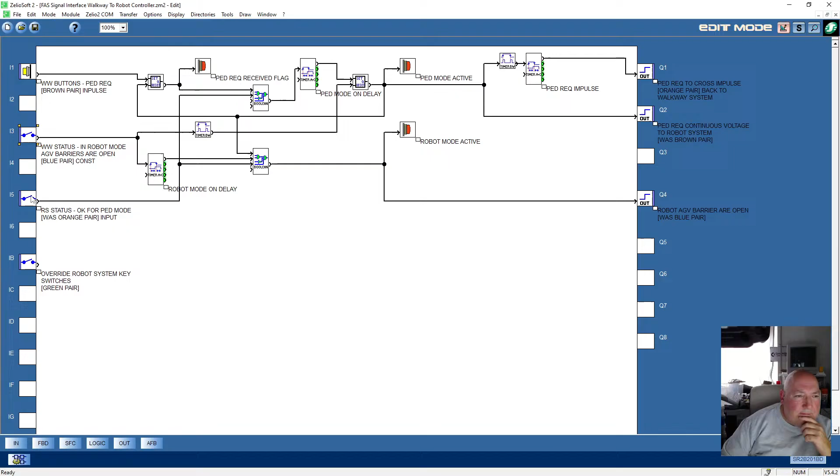That's an impulse. Right, let's put continuous. That might get us confused with the other bit there. I'll just say constant. It's a constant. Right, okay, now this one, it's the... excuse me.